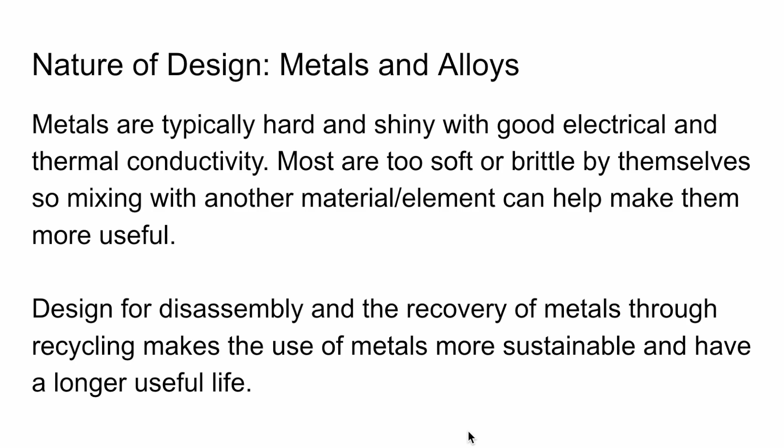Metals are typically hard and shiny with good electrical and thermal conductivity. Most are too soft or brittle by themselves, so mixing them with another material or element can help make them more useful. Designing for disassembly and the recovery of metals through recycling makes the use of metals more sustainable and gives them a longer useful life.

A metal is a solid material that's typically hard, shiny, malleable, fusible, ductile, and has good thermal and electrical conductivity. You're used to seeing some of these, like iron, gold, silver, aluminum, and there are alloys such as steel. Other metals you may know are potassium, sodium, and lithium. There are more metals than nonmetals, and most metals you encounter in daily life are actually alloys. It's rare to encounter a pure metal in its elemental form.

An alloy is a mixture that contains at least one metal. This can be a mixture of metals, or a mixture of metals and nonmetals. For instance, copper and tin give you bronze, like this bronze statue made out of copper and tin. Steel is an alloy between iron and carbon.

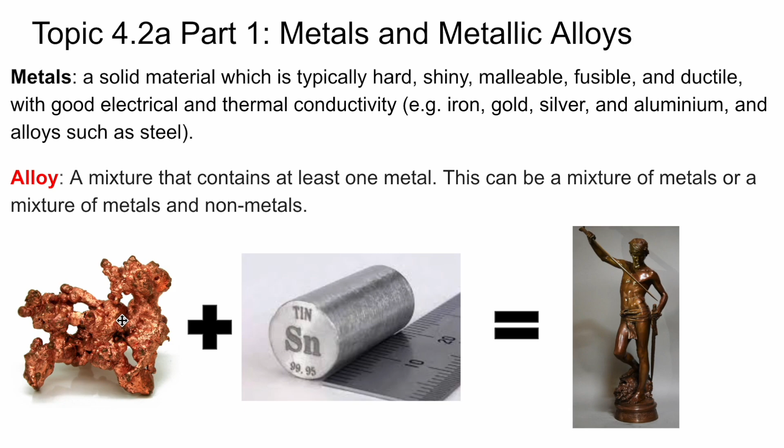Again, you rarely see metals in their elemental form. The one you probably most commonly come across would be copper. Copper looks like this, and copper wiring is probably the most common example. Maybe silver, and of course gold, if you have pure gold, but most gold that is made into jewelry is actually an alloy of silver and gold, or platinum and gold.

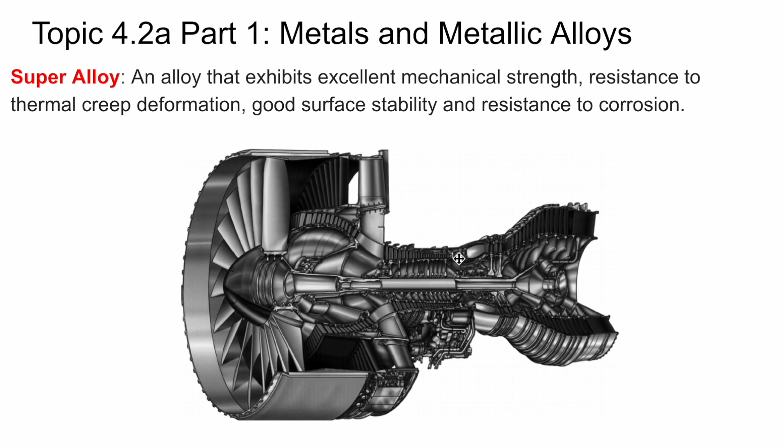Superalloys are alloys that exhibit excellent mechanical strength, resistance to thermal creep and deformation, and good surface stability and resistance to corrosion. It's the kind of metal you would want to use in a jet airplane engine, because it has that excellent mechanical strength, resists deformation, and resists corrosion.

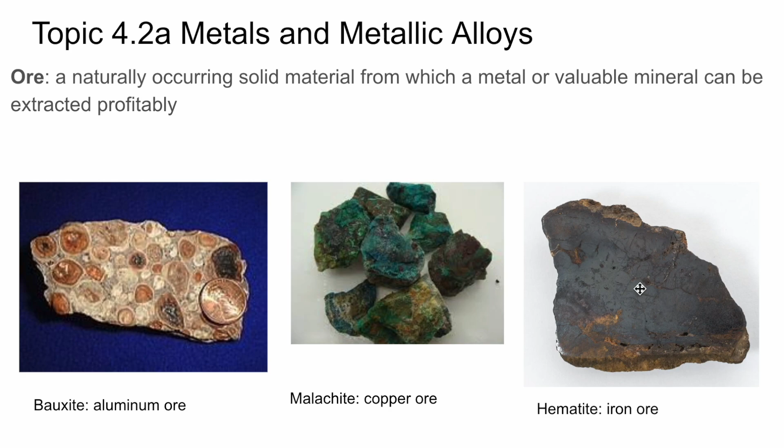Let's understand how we get metals. An ore is a naturally occurring solid material from which a metal or valuable mineral can be extracted profitably. For instance, bauxite is an aluminum ore, malachite is a copper ore, and hematite is an iron ore. These are essentially rocks with a lot of metal in them that you can extract. All rocks have some trace amount of metal, but removing those trace amounts might cost more than the value you get out of them, so you need a rock with a large percentage of the metal to extract value profitably.

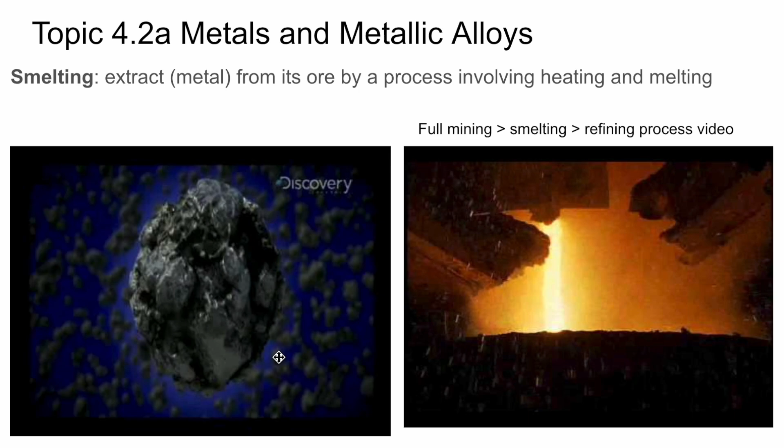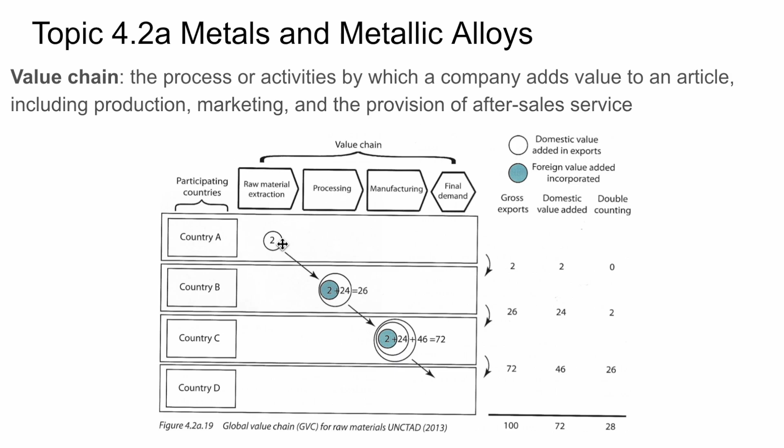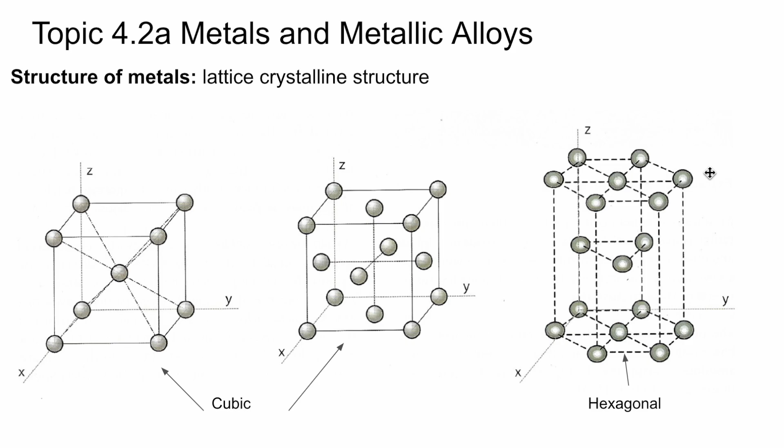Solids generally form lattice crystalline structures. Think of quartz crystals, which are hexagonal, forming this hexagonal quartz structure. Metals do the same thing, forming crystalline structures, a repeating shape.

This leads us to the idea of grain sizes. Metals are crystalline structures comprised of individual grains, and the grain size can vary and be determined by heat treatment, particularly how quickly the metal is cooled. Quick cooling results in small grains, slow cooling results in large grains. Grain size in metals can affect the density, the tensile strength, and the flexibility of the metal.

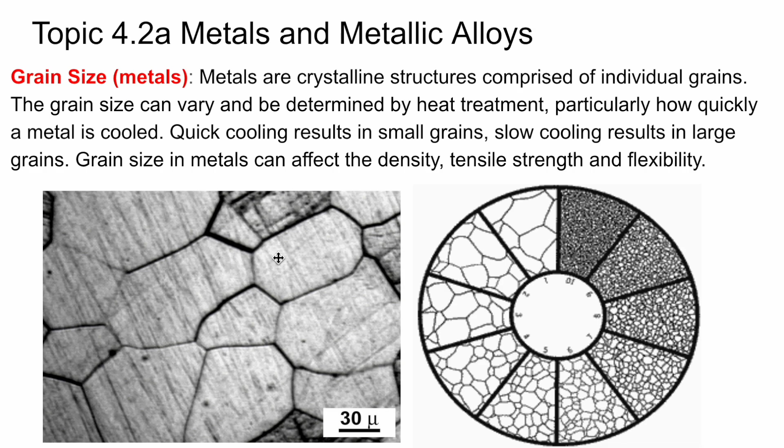If you think about this, it makes sense. Crystals take time to grow. So if you let a metal cool slowly, the crystals can grow bigger. If you let a metal cool quickly, the grains just don't have time to grow, and therefore they're smaller. Different grain sizes are caused by multiple growth sites, called nucleation sites. These variations in crystal growth are affected by temperature inhomogeneities in the cooling metal.

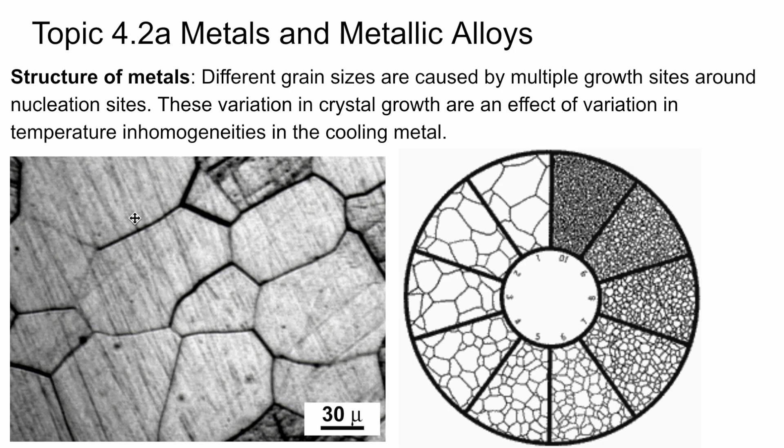Now let's talk about what happens with grain size. A variety of grain size is determined by heat treatment. Reheating metal or alloys allows the grains to change their structure. Slow cooling forms larger grains, as we just talked about. Rapid cooling, or quenching, forms smaller grains. Directional properties can be formed by selective cooling in one area of the metal or solid.

This is how grain size affects the properties. If you want something with a lot of tensile strength, you're going to want coarse grains—larger grains give you a stronger metal. Toughness will also be determined by larger, coarser grains, which comes from slower cooling. For ductility, you want coarse, larger grains, giving you a more ductile metal.

Brittle or hard metal properties generally go together, so you're going to want smaller grain sizes. For instance, a knife edge you want to be hard, so you'll want smaller grains, giving a more brittle, harder metal. If you want flexibility and malleability, you're going to want coarse grain size, which gives you a more malleable metal.

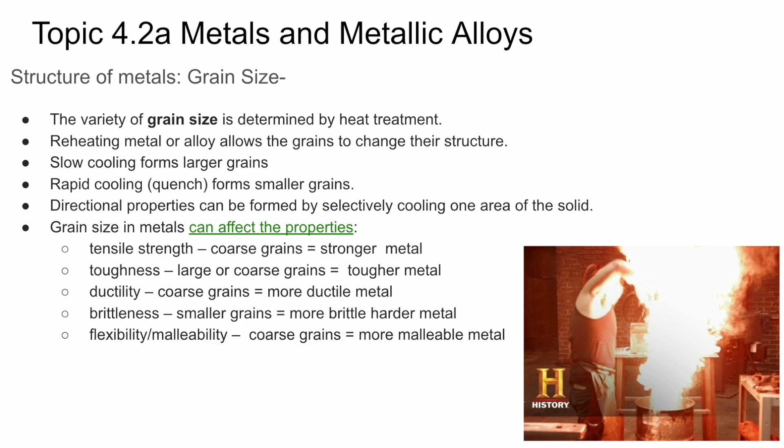Tempering is a heat treating process designed to increase the toughness of an iron-based metal by heating it and allowing it to cool in air. Tempering decreases the hardness of the material, which usually increases the ductility and decreases the brittleness.

Japanese samurai swords are really interesting that way. The edge is very hard and brittle, but the spine, the back part of the sword, has a coarser grain size. So you differentially cool a samurai sword, and that's actually what makes them curve, so that you get a hard edge and a more malleable but tougher spine.

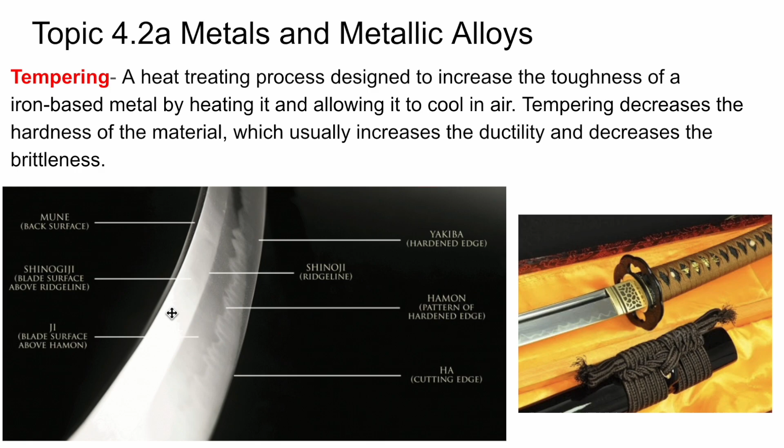Work hardening, also known as strain hardening or cold working, is the process of toughening a metal through plastic deformation. If you remember from the physical properties of materials, plastic deformation is when you change the shape of a material kind of permanently.

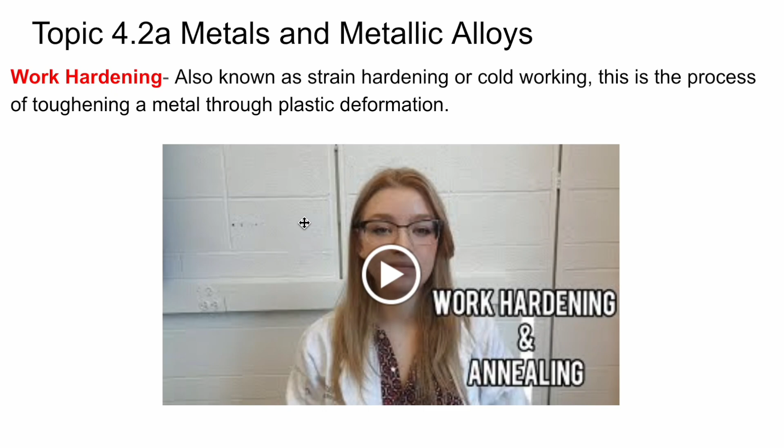Essentially, if you take a metal hanger and bend it, you have work hardened part of that hanger at the bend, and it's actually much more difficult to straighten that bend. The same thing happens with a paper clip. If you bend a paper clip, you have hardened the part that you just bent, so that it is actually more difficult to straighten that out compared to bending a different part of the paper clip or hanger.

I want to talk about how alloys make metals harder, essentially, or how they change the properties of metals in lots of different ways.

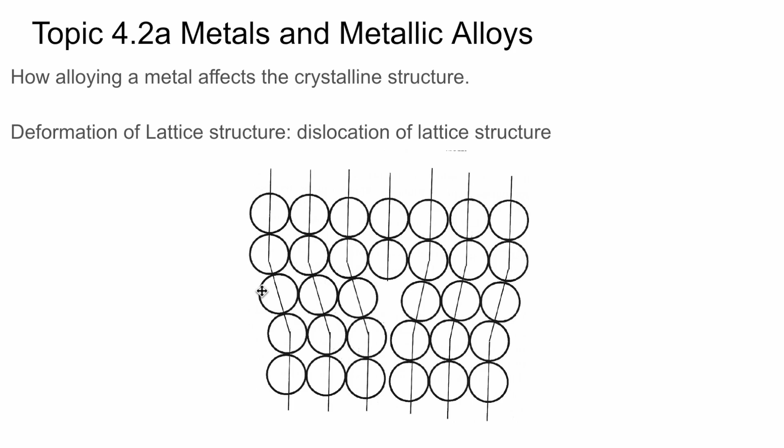So let's say that this is the lattice structure of a metal, and this is an elemental metal. If this was, for instance, iron, these would all be iron atoms here that you're looking at. They're easier to dislocate the structure of the lattice. So when you apply a mechanical property to this, like compression or tensile forces, or you're bending it, it's going to dislocate the different atoms.

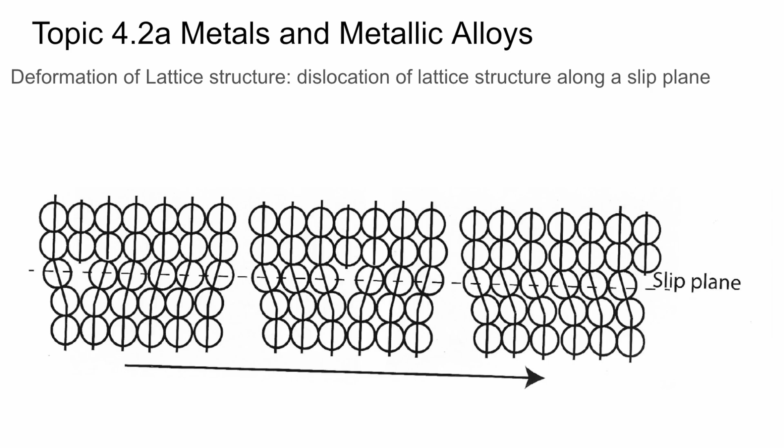If you can interrupt that by adding another type of atom in there, then it's harder for that slip plane to propagate. So for instance, these are maybe some carbon atoms in iron atoms, and this is going to make it harder to actually cause that slip plane to continue. It's going to make that plastic deformation harder to propagate through the metal.

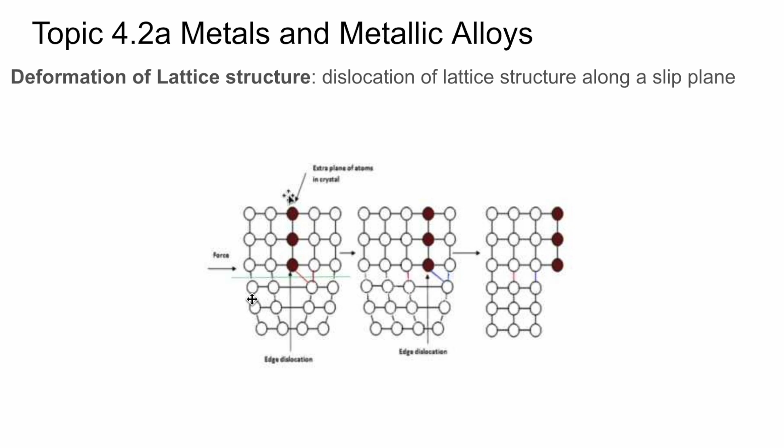And so that's how alloying works. You can watch this video right here about alloying properties. I would highly recommend that you watch that.

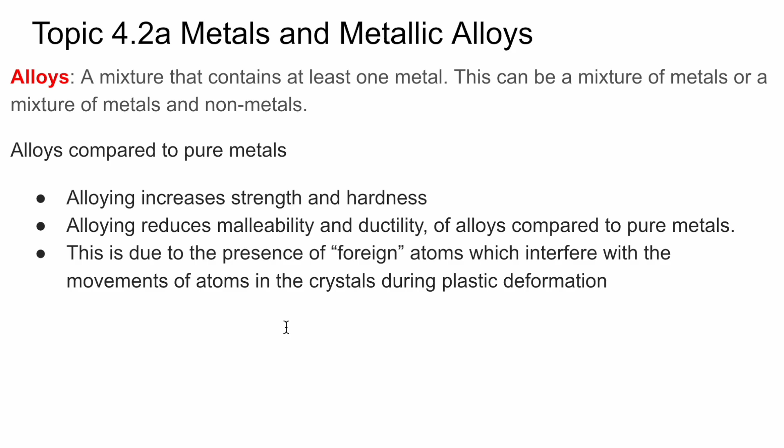Let's compare alloys to pure metal. Alloys increase strength and hardness. Alloys reduce malleability and ductility, compared to pure metals. This is due to the presence of foreign atoms, which interfere with the movement of the atoms in the crystals during plastic deformation. They essentially block the plastic deformation, that slip plane, from propagating.

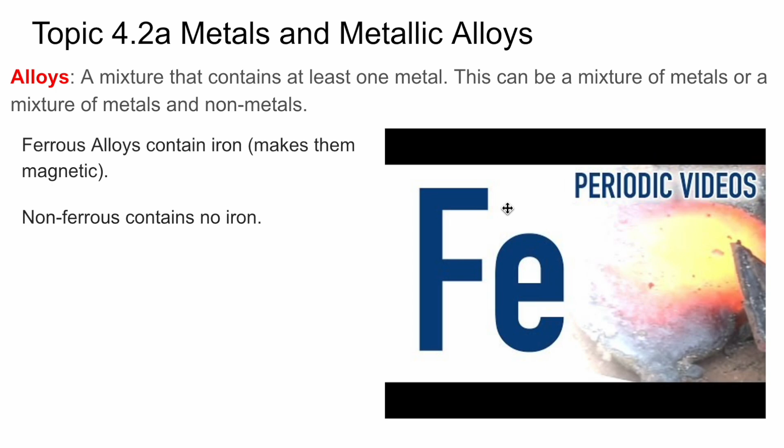There are lots of ferrous alloys, and these contain iron. You can watch this video to just get a sense of what iron is and how it is alloyed. Non-ferrous, by the way, contains no iron.

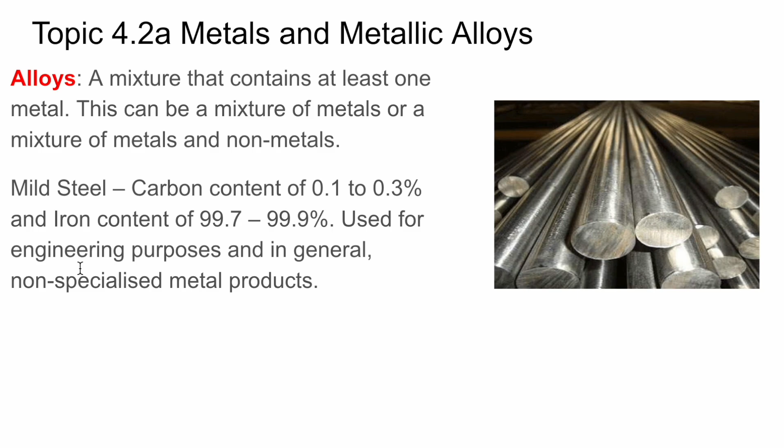One of the first alloys of iron that you should probably know is mild steel. The carbon content of mild steel is pretty low, it's 0.1 to 0.3, and the iron content is 99%. It's used for engineering purposes in general and non-specialized metal products.

Stainless steel is an alloy made up of iron, nickel and chromium. It resists staining and corrosion and is therefore used for the likes of cutlery and surgical instruments. It also resists oxidation, which is corrosion. It's a good choice if you're doing something that gets exposed to water a lot or is in a marine environment.

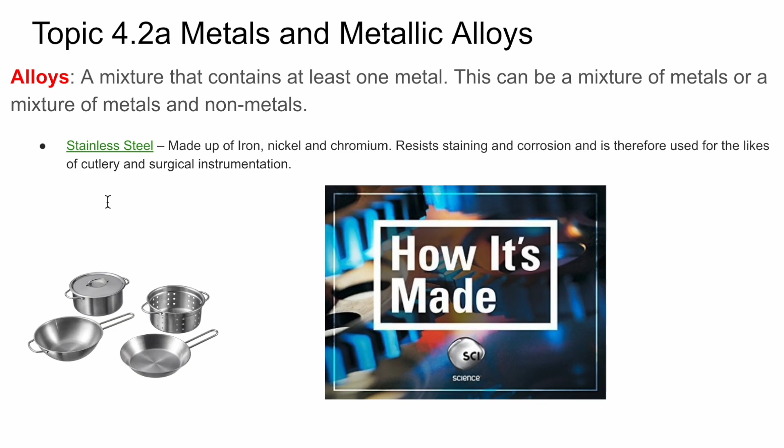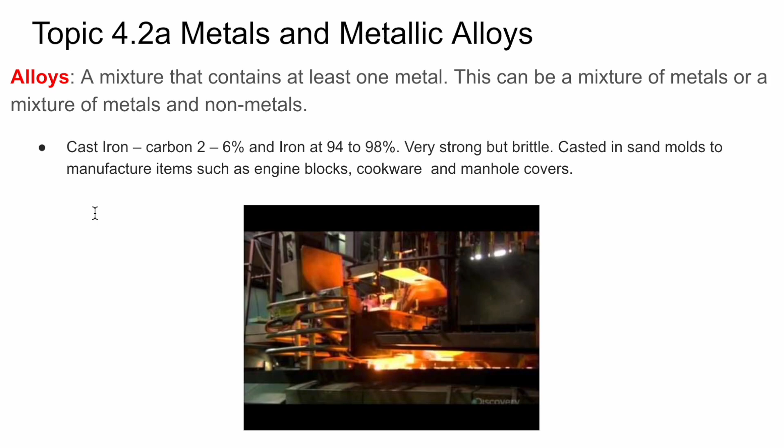Cast iron is going to have a carbon content of 2 to 6%, so an iron content of 94 to 98%. It's very strong, but it's brittle. It can be cast in sand molds and manufactured into items such as engine blocks, cookware, and manhole covers. These are all cast iron. And this is a video that shows you that process.

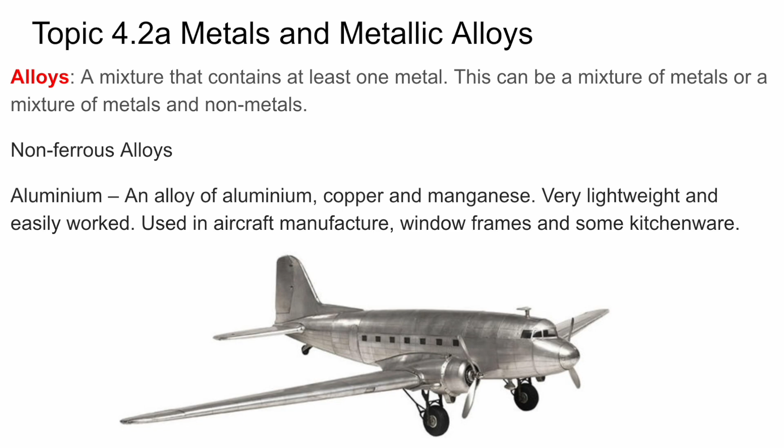We can talk about non-ferrous alloys. Aluminum is an element, but you can form alloys with copper and manganese, and it's very lightweight and easy to work. It's used in airplanes and aircrafts, window frames, kitchenware, things like that. So aluminum alloys are generally what you encounter. When you have a Coke can, it's an aluminum alloy.

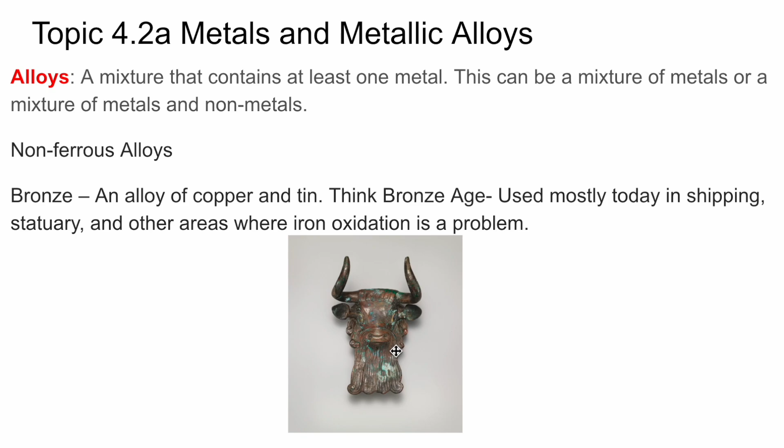Bronze is another alloy that we should know. It's a non-ferrous alloy of copper and tin, and you can think of the Bronze Age. It's used mostly today for shipping and statuaries and areas where iron oxidation is a problem. This is an old bronze sculpture from thousands of years ago, and it's got some oxidation on there, but it's still in really good condition.

Brass is a combination of copper and zinc, and it usually has the proportions of about 65 to 35% respectively, and we use it for ornamental purposes, instruments, and electrical fittings.

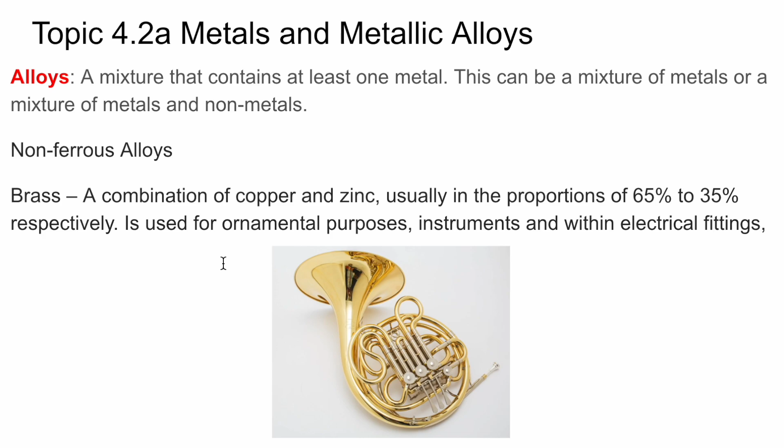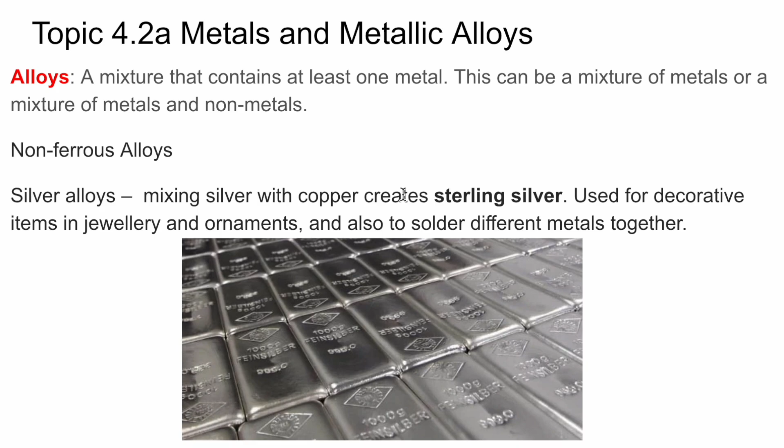Silver alloys: generally, what we're going to do is mix together silver and copper, and this creates something called sterling silver. It's used for decorative items in jewelry and ornaments, and also in solder for soldering different metals together.